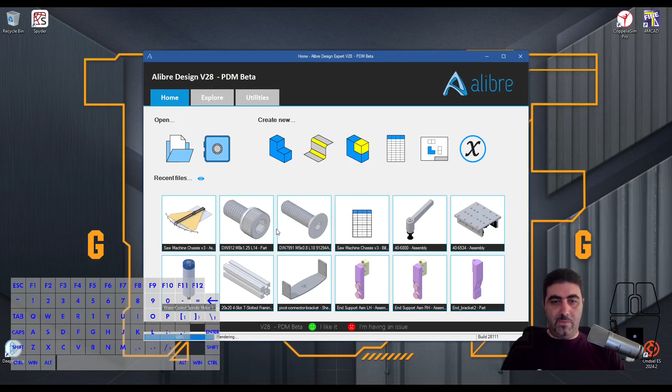So we will be starting a new assembly, and the first part that we will be adding is the carrier, not the I-Beam. We will make a subassembly of each of the two carriers, and then we'll bring it together in the main assembly with the spacer shaft, nuts, and spacers.

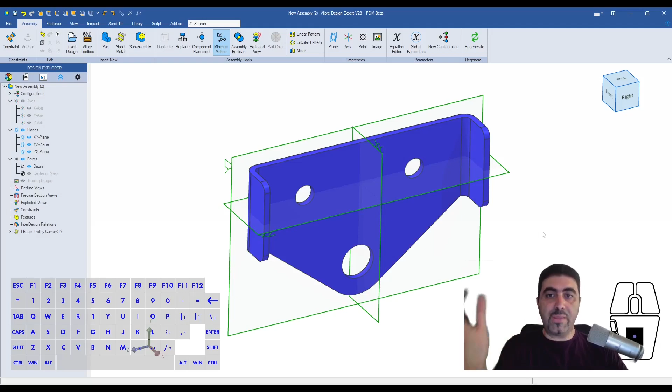Starting tip right off the bat: when we're putting a new part in, we don't just click randomly. If it's the very first part, it's a good idea to click on the origin. You see that I'm getting that little icon next to my pointer, that means I'm clicking on the origin. What happens if you do that is we have aligned the coordinate system of the carrier part with that of the assembly. Then the next thing you do is you anchor the part.

Then we insert the I-Beam roller shaft, 1, 2, we need 2 of them. Now, we said that we'd be putting these in these holes and then welding them. So I will select that outer circular edge, select this one. I didn't anchor it. And then hit Control Q.

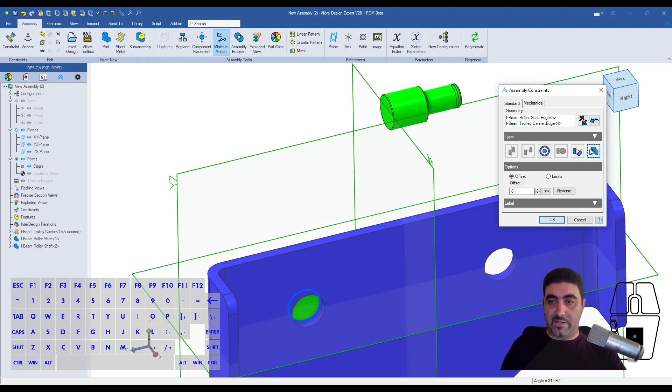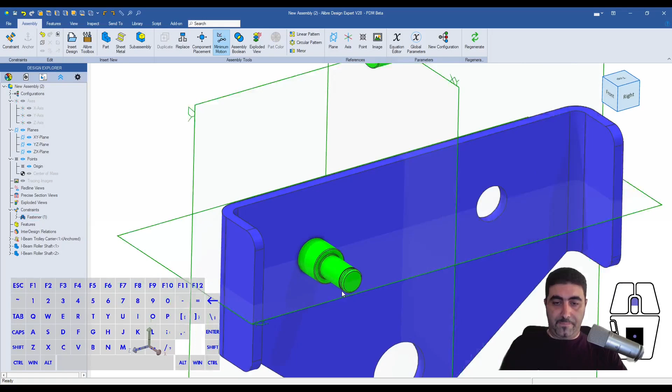Now what happens here? We get the assembly constraints menu, and it's pre-filled. It knows I want the fastener constraint, which is a constraint that is like a coaxial and a coincident constraint at the same time. Of course now it's the other way around, so I will click the flip button, and now it's the way I want it. So this part now can rotate, but it cannot go in and out.

Sure enough, if I open its reference planes, you can see that it can rotate, but it cannot go in and out. Now, if I want to fully constrain it, I will just create an angle constraint between these two planes. Again, I selected the planes first and then opened the assembly constraints. Hit 0, now they're parallel, and hit OK. Let me hide the reference geometry.

Now you saw that as soon as I hit OK, the assembly constraints dialog box went away, right? And that is because I had selected geometry before I opened it.

Now if I hit Control Q and I open it and it's empty, look what happens. I click here, I go to select my geometry, I select this edge and this edge. No, I don't want the angle constraint, which was the last one I used. I want the fastener constraint, and I want to flip it. Okay, look, now it didn't go away, right?

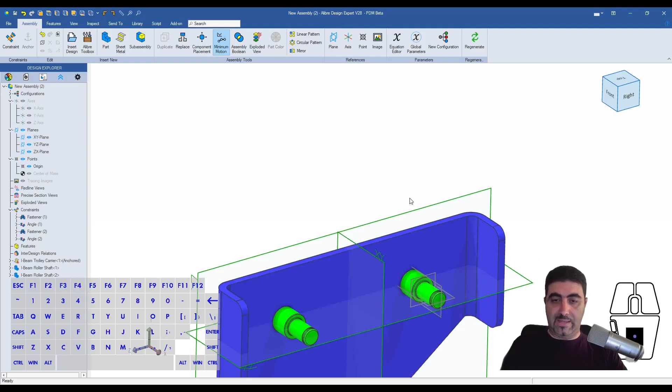So I'll just show the reference geometry. Go back here, select this and this angle. Control A is 0 degrees of angle. And OK. Now you saw that I had to close that assembly menu, and the only difference is that I opened it without having geometry pre-selected.

That's a little detail there that can help you, depending on what you do, it can help you save a bit of time. Okay, so I've put these shafts in. Of course, these will be welded, right? So what do I do now?

Now, it's a good idea to put the roller bearings in. Basically, we kind of assemble it as we would in real life. That's the way I like to do it. It makes more sense to me, and it's easier to keep track of what happens. So the roller bearings we got from SKF.

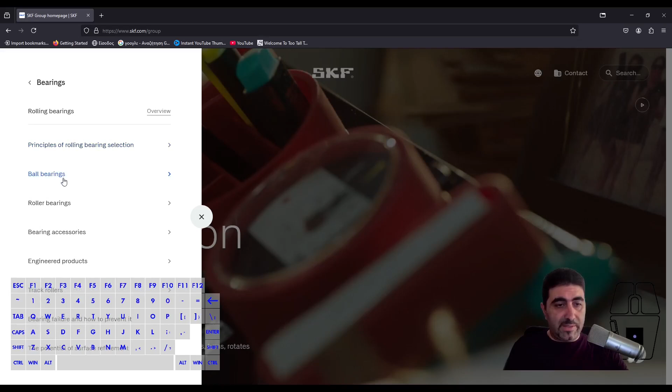It was a 3200, the double angular contact double row ball bearing. So you go to rolling bearings, ball bearings, angular contact ball bearings, double row angular contact ball bearings, and we will find it here. It's the smallest one of the series, so I can just click here. I don't need to search it like I did the other day. Go to the CAD tab.

There you go, we can select it now. It's got a lot of different formats, but it doesn't have an Alibre, so we will go with STEP. Now, a quick tip here: if for whatever reason you download something and it doesn't show up correctly when you download the STEP file, go for the SolidWorks version.

You can go for the Creo version as well, or you can go for the Inventor version as well. Why is that? Because Alibre opens those formats as well, and they're more likely to be correct because they're not an export, right? They're native files.

I will make an example of that. I will show that as an example later on from the McMaster-Carr website, because this is a large part. I don't want to waste time on the conversion.

Our zip file could not be generated, yet I see the zip file and it's got the step file in it. So okay, I will just cut it and paste it in my downloads folder and then close the folder out. Then I go into my assembly.

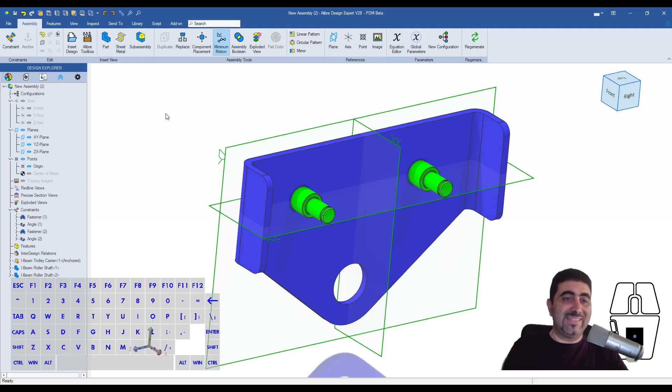because Alibre is going to create an Alibre part for it. And as soon as I create that part and save it to the location I want, I can delete the original step file without any consequences to my assembly.

Okay, so import file options. You see that this is a conversion menu. I hit OK, standard options, and it's telling me that the file was imported without errors.

And in Alibre, you can just click and drag, control click and drag to create a duplicate of an assembly, and it will understand that you're looking for the entire assembly, not just a single part.

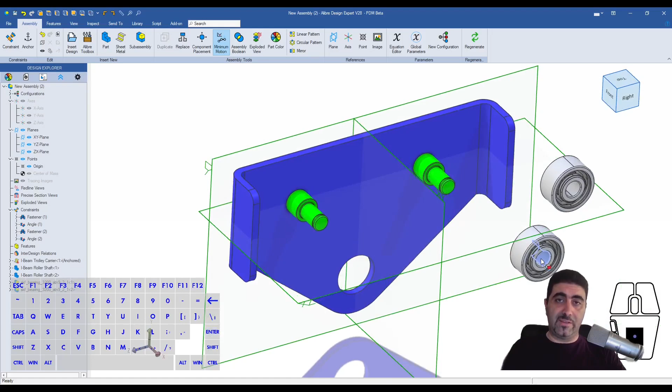So now I will again constrain this with a fastener constraint. Yep, that's where I want it to go. Nope, I want this the other way. There you go, I am done. Okay, now to fully constrain these, to fully have them stay on these shafts, what do I want?

I want the circlips. Okay, let's go to McMaster-Carr for that. And I want the circlips. Well, I want an external.

First of all, I need it to be metric. Then I want external. Then I want the ring OD. Is it ring OD? No, I want the shaft OD. Oh, for OD 10 anyway.

Okay, again, it's showing me the groove dimensions, which were very useful when I was designing the groove. Now look, default download format in McMaster-Carr is 3D step, right? Let's say I want to do 3D SolidWorks, okay?

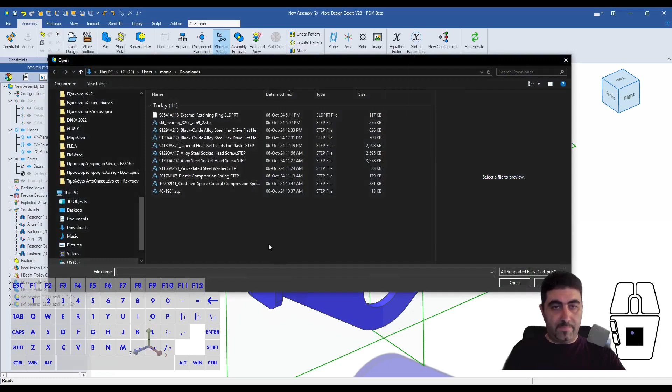So I've downloaded the SolidWorks part, and the way you handle that is you open the folder you downloaded in, and then you close everything off, and then you go to File, Open, right? And you open it from there, you get the same actual menu,

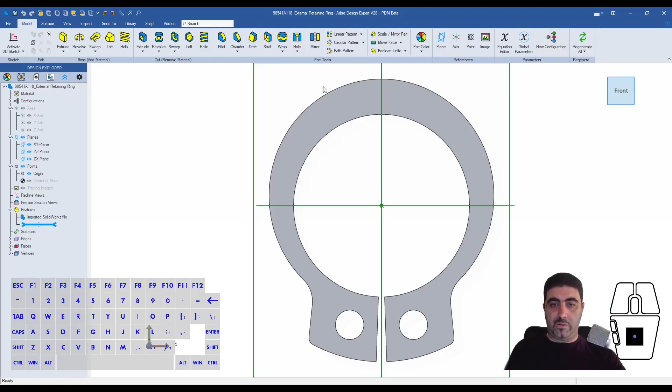and now it's imported. Standard issue with Alibre: you bring in a part, an imported part, and it doesn't show anything, right? But if you regenerate all, you will see the part, and if you change the color, you will also see the part.

That's been an issue since V24, at least that I'm aware of with Alibre. But like Shift F5, it's good to go. I'm not sweating it. And then again, look, this tells me it's an imported SolidWorks file.

Okay, quick tip there. McMaster-Carr parts come with a file name that starts with its product code. Well, and that's not very helpful. So this is a DIN 471 external circlip.

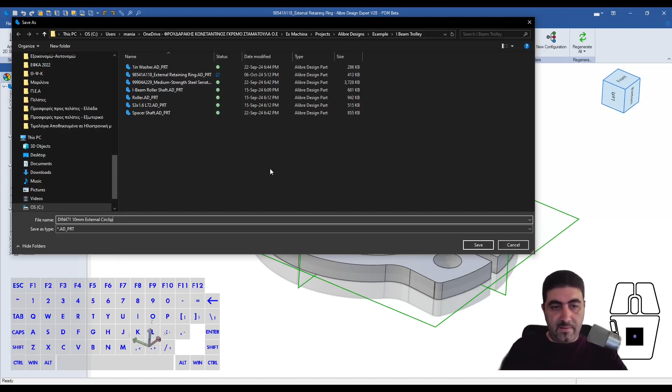So what I like to do, I will do it as a save as now, but ideally you should have done it in the save phase of this whole thing. So you just go DIN 471, right? 10 millimeter external circlip, right? So you save that, but in any case, let's bring it in.

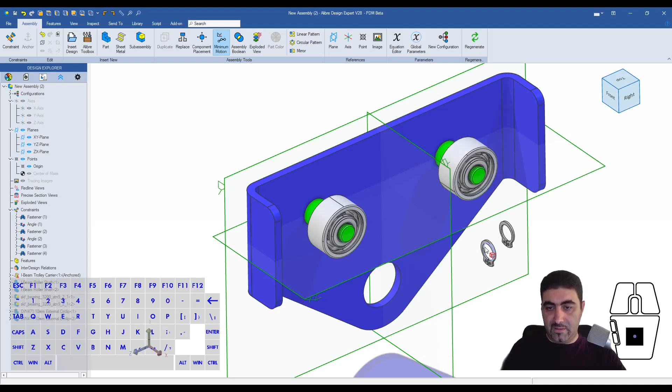So we can delete this and insert this. Again, I want 2 of these. And again, I will do the fastener constraint.

Okay. On. Again, we are away and we're done.

This can still rotate if you really want to pin everything down. You can, but just giving a random parallel constraint, or just even that would work. So let's not overthink stuff.

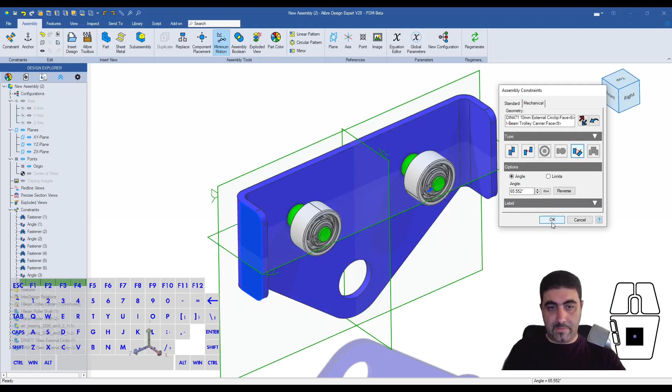Right, if I was assembling this on my bench, what would be the next part? The next part would be the roller. And I didn't assemble it. Look, everybody makes mistakes. If I was assembling this on my bench, I would put the bearing in the roller first.

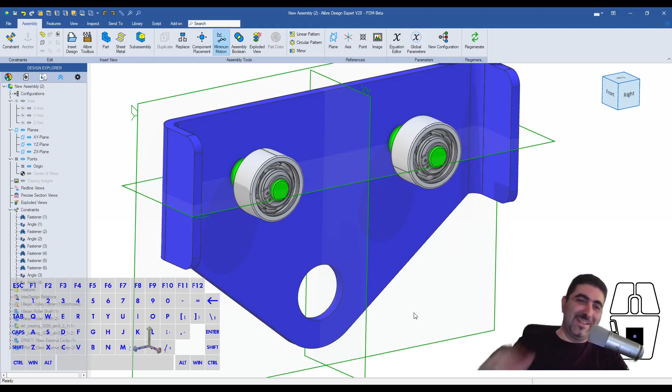But anyway, let's bring the roller in now. The reason I would do it like that is because of the way I designed it, it's a lot harder to get that circlip in now. But okay, we're not worried about that. In real life, I would need to put the bearing in the roller first, put that circlip in first, and then put it on the shaft. But okay, let's do that circlip.

30 millimeters. Let's go back to McMaster Carr. This time we need an internal circlip. So we will go for the internal retaining rings. We want metric, 30 millimeters, DIN 472. So 471 is external, DIN 472 is the internal one.

Let me just do the step file now. Again, I can just minimize, come in here, downloads, that. I'm okay now. File import without errors. Let's put it in there. Let's get a duplicate and let's do the same thing we did before. Is that the way I wanted it? That works. That works for me.

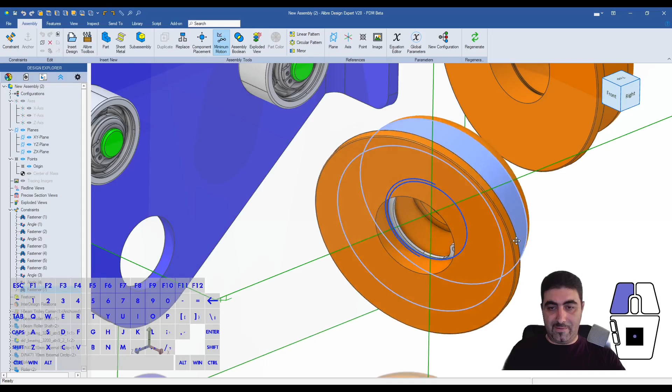Okay, same thing here. And again, I need this split.

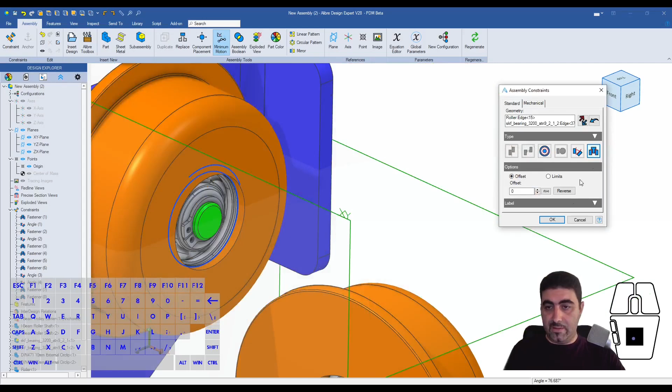Okay, now I need to assemble these rollers. So again, fastener constraint. You see it basically says fastener constraint, but it has so many different uses. Just remember that it does two things at once: it does coaxial and coincident, but it doesn't constrain the revolution. Let's see here. There you go, there's our gap, that we accounted for when we were making our shaft.

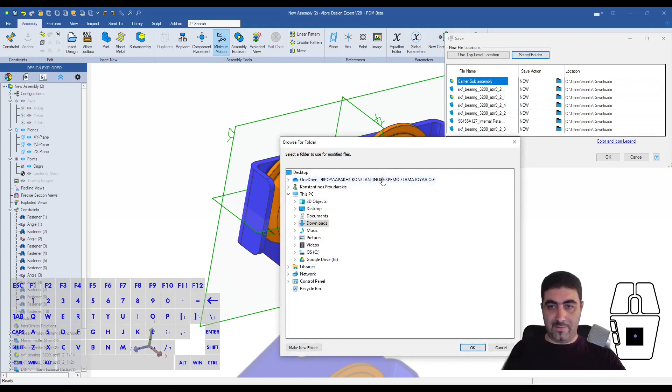Everything is done. So this is a complete carrier assembly right now. I'm going to save this, and I'm going to call it the carrier subassembly. Oh well, it's trying to save it in the downloads folder. I'm going to change that.

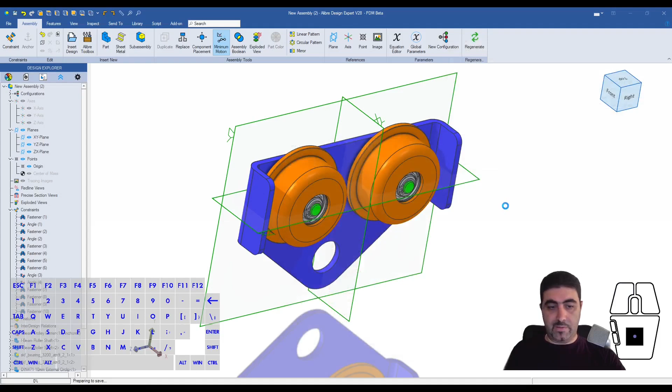But before I change that, again, McMaster Carr part. This is a DIN 472 13 millimeter internal circlip. Now I'm going to select my folder. Hit OK, and everything is saved. Now every step file is converted. Everything is working perfectly.

Okay, so now I can start the main assembly. The way we do that is we start another assembly. The first part we bring in is the actual I-beam. We click on the origin, finish, then right click on the part and anchor it. You see here it says anchored.

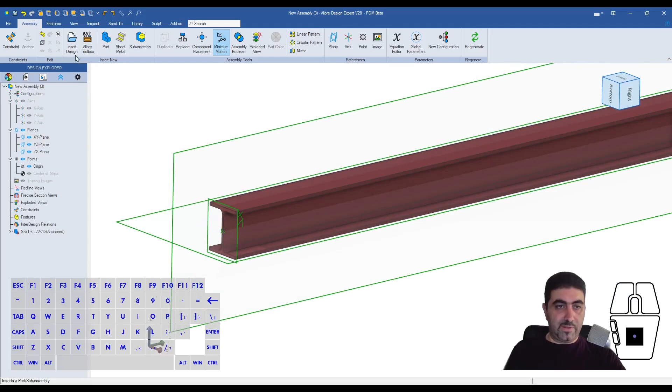Okay, now we're going to bring in our subassembly, the carrier subassembly. We have a complete carrier here. And how are we going to assemble this? Now, you will see that there is going to be some fine tuning in the assembly later on to get everything to line up correctly and whatnot.

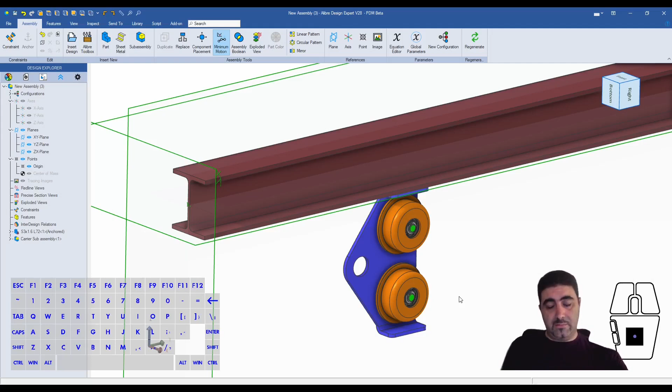And that has to do with the number of spacers, right? The number of spacers I went with in the shaft was a guess. So the way we would assemble this is this: first of all, I'm going to bring up this triad and bring it into the orientation that I want it to have. Then I'll also bring it near the position I want it to have. I mean, that's just avoiding some extra unnecessary work down the line.

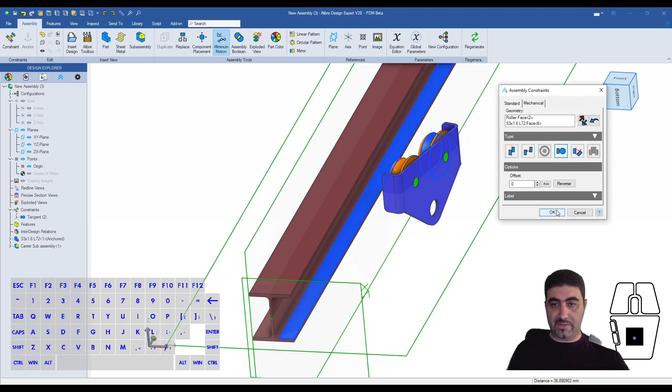So I selected these two surfaces and I want them tangent. And then I want this and this surface, and I also want it tangent. Then I want this flange here of the roller and this edge of the I-beam, I want them at a distance of 1/16 of an inch.

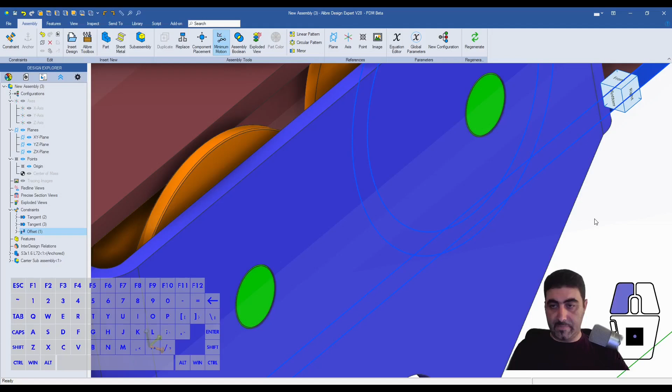See what I did? That works, man. That definitely works. I could have made the roller a bit larger actually, but I gave it a large fillet, so I could have made it a bit longer, but it should be fine. So I am fully assembled here.

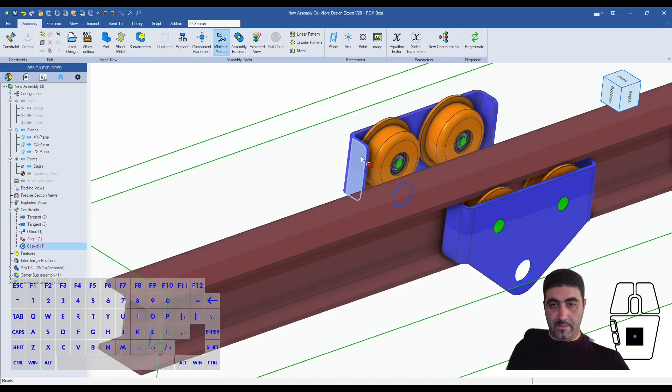I'll create a duplicate. What I'll do is I will assemble the duplicate based on the other carrier because I want them to move together. What else? This, coaxial as well, that should be fine. Okay, and now the distance.

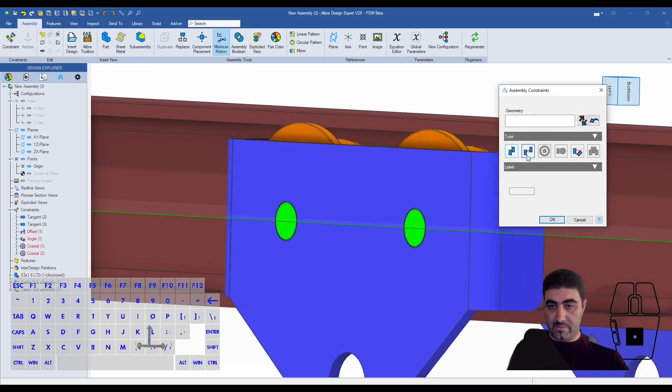There you go. So this is starting to look like an I-Beam trolley already, right? And some exciting stuff. Okay, now I'll bring in the spacer shaft.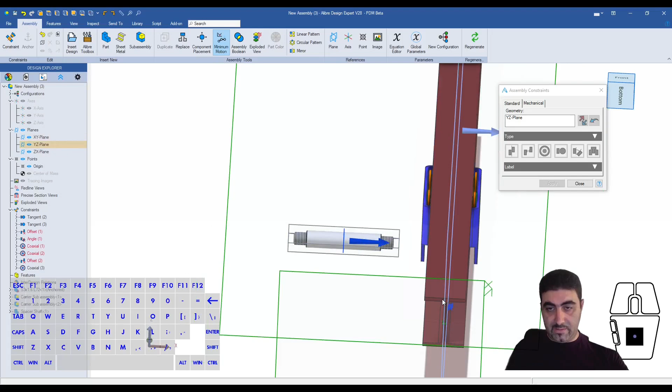Where is my spacer shaft? There's my spacer shaft, and I want that to be coaxial to this hole, smack in the middle. So I will show its reference planes, and then just say that this plane and this plane. I'm looking at the arrows to make sure I am selecting the correct plane, right? So these two planes are coincident, and yep, I should be good to go.

Now I want to fill this space in with spacers inside and outside, and then I'm going to put the two nuts in, and that's going to hold everything together. But we also need another part. That other part is the hook.

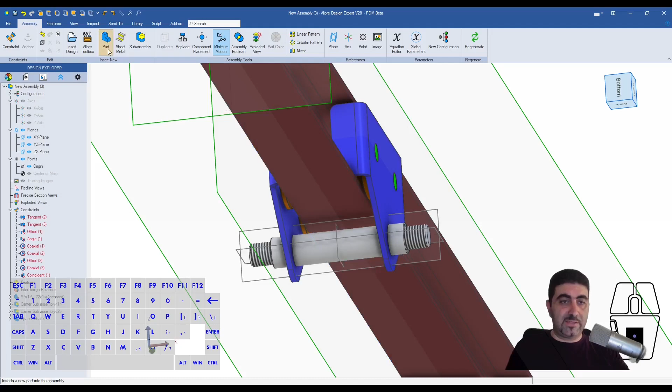Okay, so let's design a part inside the assembly. We will create this part inside the assembly. So I will go up here and just click part, and this will be the hook, right? You know what, I'll design it in here.

Make sure that when you're inside the assembly and you're making parts, make sure that when you are sketching on a plane, you select it from here, right? This is a top tip, not just for Alibre, but for most other CAD systems. You'll see that Alibre already only shows the part's planes, but there are other software where you only see the assembly's planes. In any case, all parametric software, when you're designing new parts inside the assembly, make sure that when you sketch, you're sketching on the part's planes, not the assembly's planes.

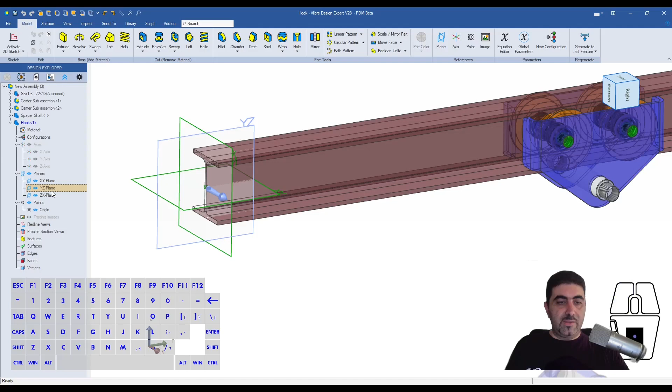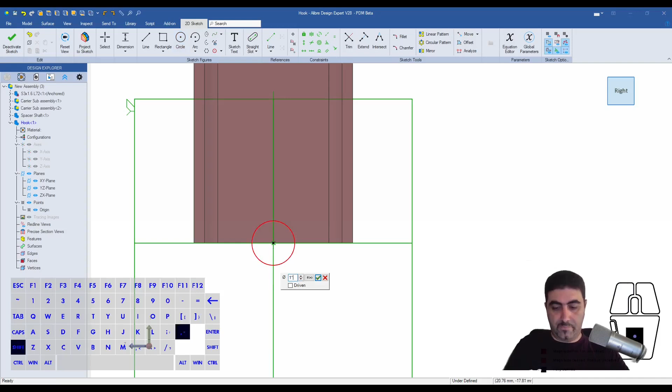So having said that, I'll sketch on the YZ plane of my part. The hook is just a sheet, a laser or plasma cut sheet metal piece. I want this to be 1 inch, and I want this to have a thickness. I don't know.

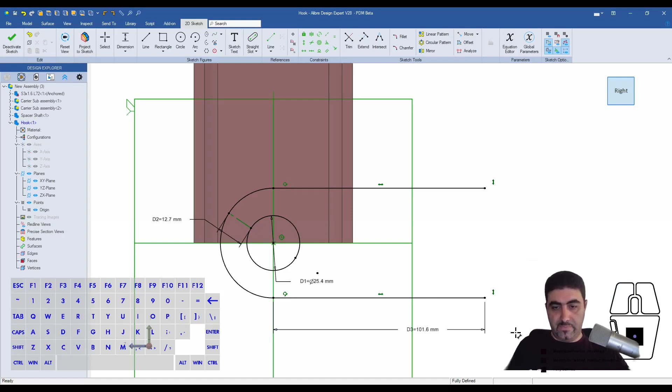Lines here. Okay, vertical constraint there, we already have that. Cool, now let's trim this little piece off. And let's say that this hangs like, I don't know, 6 inches... 4 inches. And then I'll start a tangent arc. Come on, there you go. Again, a vertical constraint, and let's give that 1.25 inches.

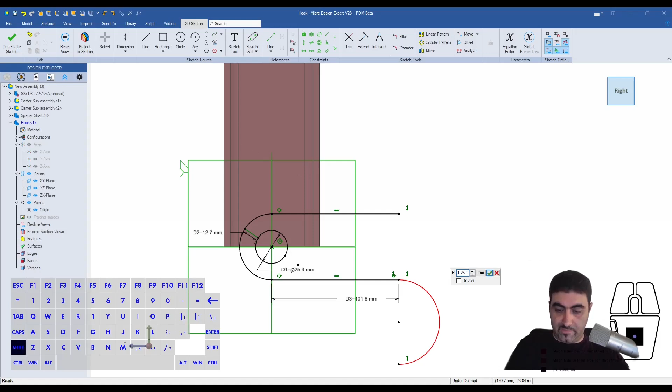Okay, that didn't work. So in vertical. I'll leave it here and give it a coincident, and then give it a tangent. Oh, doesn't need the tangent. Okay, so that's my hook.

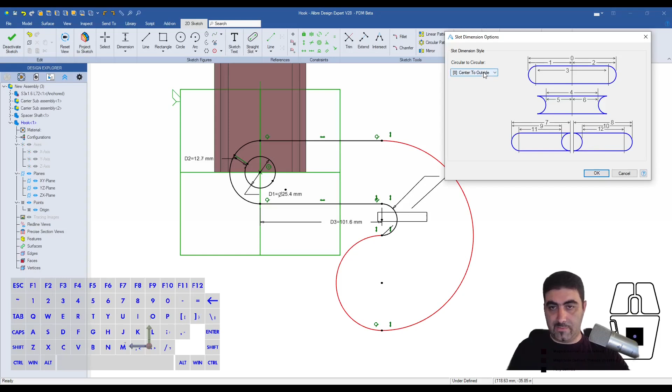Let's do that 1 inch. Let's make this distance. Okay, which one do I want now? Oh, man. Okay, I just want these to be... I don't want these to be locked. So I want this to be 1 inch.

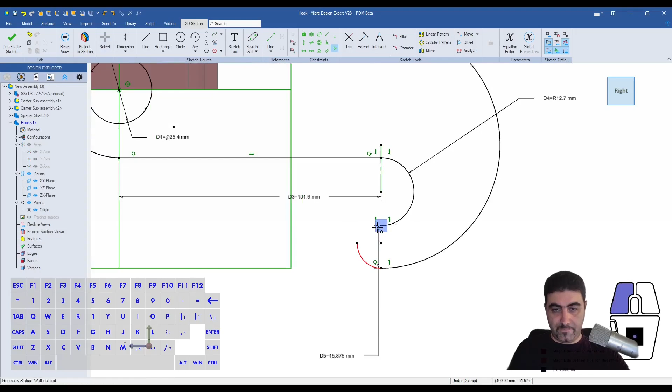There you go, that was the mistake before. Yes, this makes more sense. In any case, let's suppose this is a hook. So I'm going to do the extrude move and say that this is a 5 mil hook.

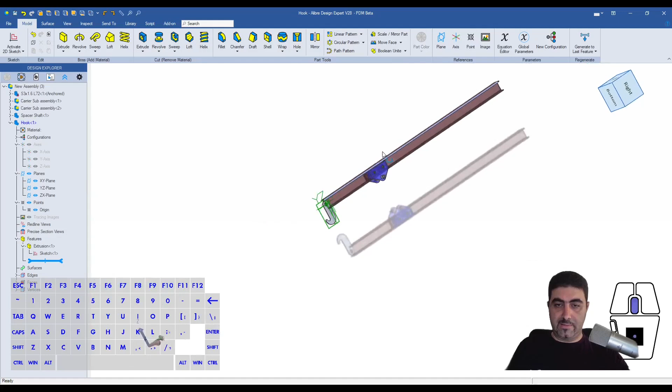And now that we're done with the design, I will right click here and check edit part, and look what happens, I can move it freely. That's why I stressed that we need to design it on its own plane, right? Because if I was designing it in the assembly's plane and using the assembly's origin, then I wouldn't be able to move this. I would move it and it would regenerate back into its original location, which is annoying.

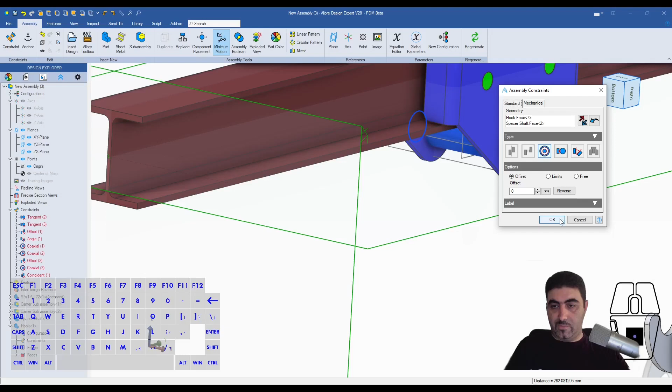So again, I'll make this coaxial. I'll also show its reference planes, and because I did the mid plane with the... not the face, man.

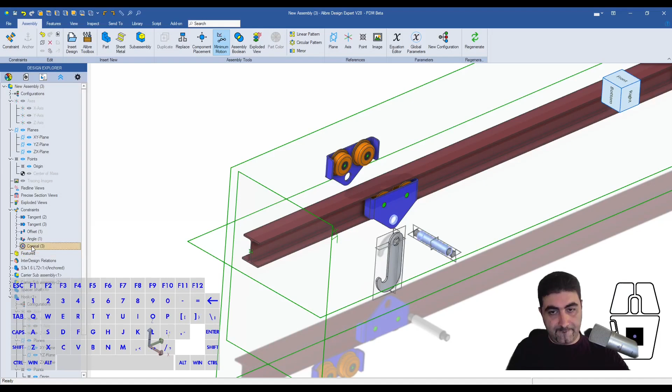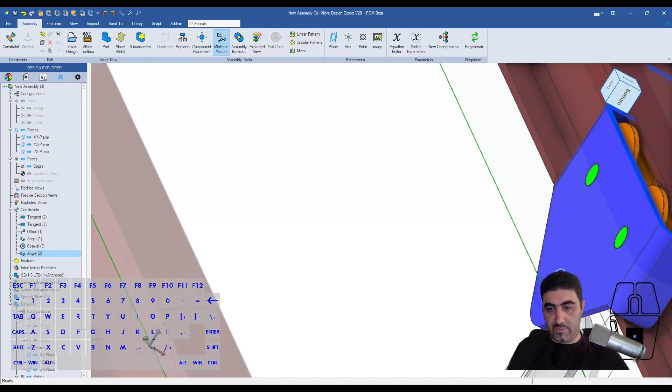Okay, so I realized that I had quite a few constraints that were unhappy, so let me try and do that again. Okay, I've got the angle going there. Here, let me give this angle as well. And then I suppose that now the simple coaxial should be fully there.

Okay, so the reason I'm getting this X here, right, Alibre is not like SolidWorks. You don't get yellow marks and red marks and all that, it's just telling you that there's an issue there. If I go check the status, it's telling me that this is an overdefined constraint, right? So yes, it can solve that, but for some reason it thinks that doesn't need to be there.

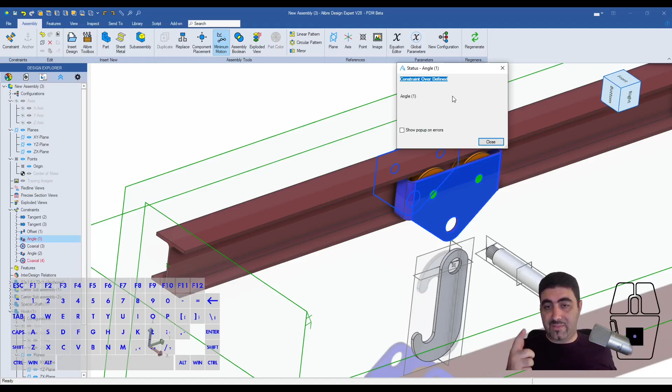And I'm going to do a video about that. So when you're selecting two faces in Alibre, it's not like SolidWorks or Fusion or whatever, where the software automatically thinks that you selected the plane that face defines. So here, by selecting these two planes, these two faces, I just selected these two faces.

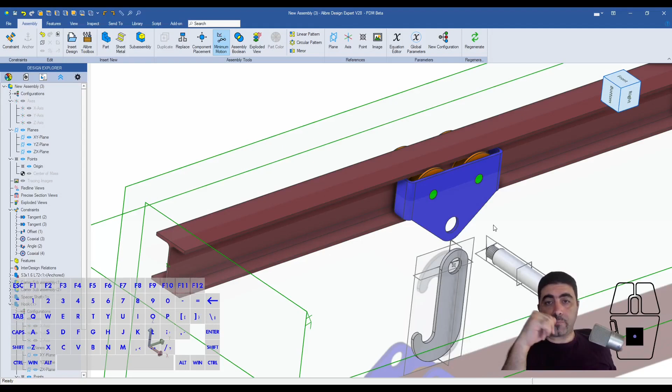So when I gave it an angle of 0, that means that this edge with the other edge should be at an angle of 0, and also this edge with this edge should be at an angle of 0, which basically defines the stance of this thing in space completely, as well as the faces themselves. So that's what I think happened, and that's why it doesn't need the second angle.

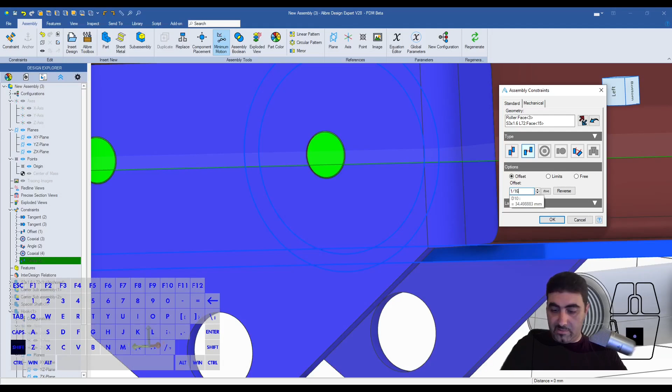In any case, let's just give that the offset of the roller flange again. And it's happy now. Okay, cool.

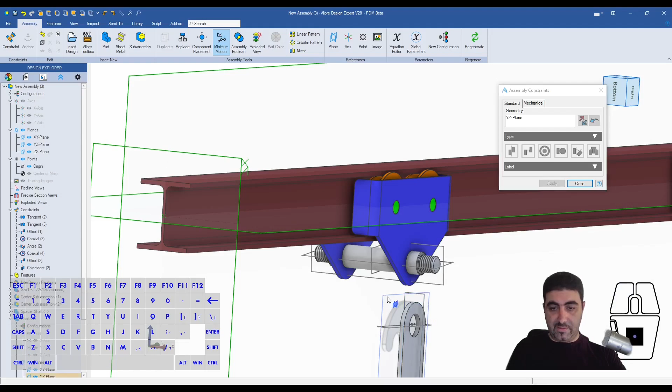We've still retained this coaxial, so I'll just do this and this. Okay, and then this and this. Okay, and then this and this. Offset of 0. Okay.

It's not clear. It just clears, which is how we like it. Okay, so that hook is terrible. Luckily, we can fix it.

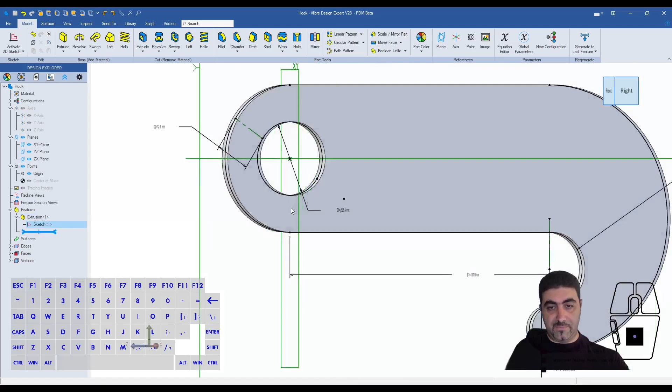I'll edit it in a separate window now. Again, Shift F5, I'll edit my sketch here. I think that if I take this at an angle, it'll make more sense. Like 12 degrees. Yeah, that looks more like it. That's almost acceptable. Okay.

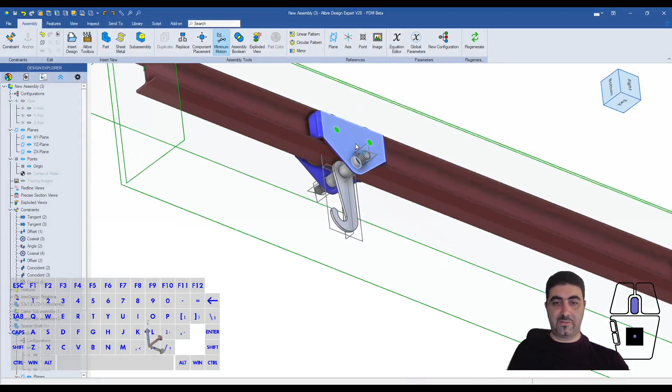Now, and we also need to edit here. We need to give the hook a color. Okay, let's make it bright red. Bright red, easy to spot from far away. I could have made it bright yellow actually. Anyway,

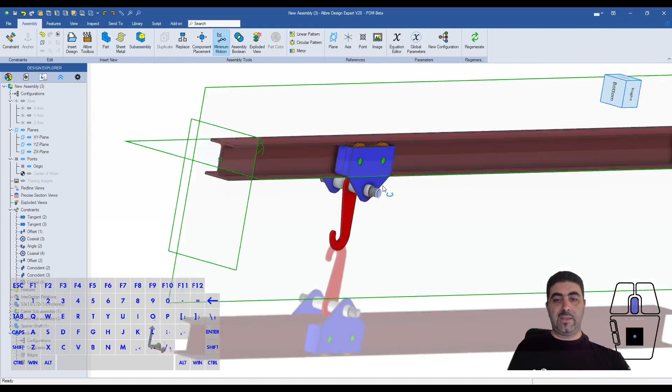Let me turn off the planes of the individual parts, also known as reference geometry. And this is our I-Beam trolley. All it's missing is the flange nuts and the spacers. So this looks like an I-Beam trolley. All it's missing are the spacers.

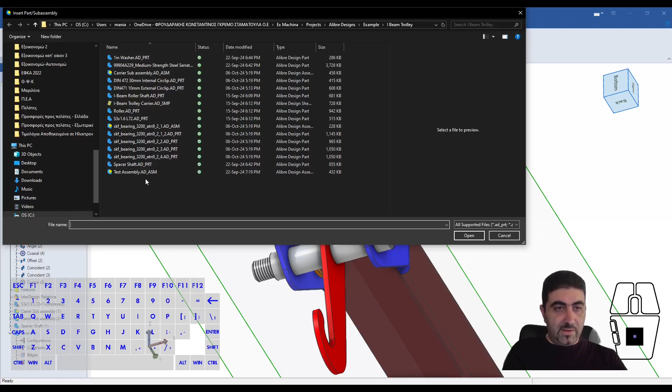Okay, now the spacers, I find that it's more trouble downloading than designing. I did design one in the video that I made the spacer, and I should have it already. So if I go in here, I should have a piece called a 1-inch washer.

Now put it in here. Now I want 4 of these. Why 4? You'll see why, because I'll be assembling them and then patterning them.

We need a fastener constraint there. We need a fastener constraint there. Don't want that going away now, so we need a fastener constraint there. Where are you? Fourth one? There you go. And we need another fastener constraint there, and like so.

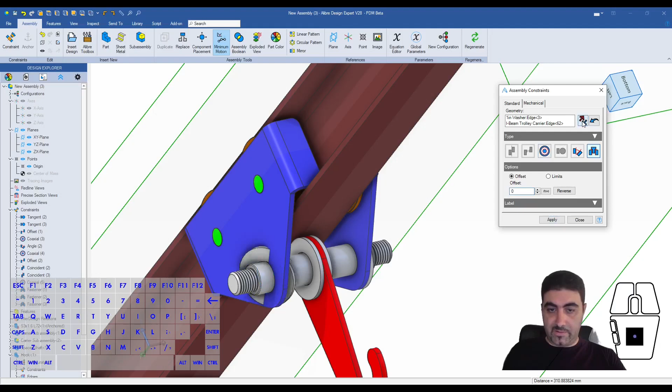Let me just save that. Yes, I want to save the hook. Yes, I want to save it in the same folder. Quick tip here, I don't think Alibre does internal parts like SolidWorks. And thank God for that. I kind of hate that in SolidWorks.

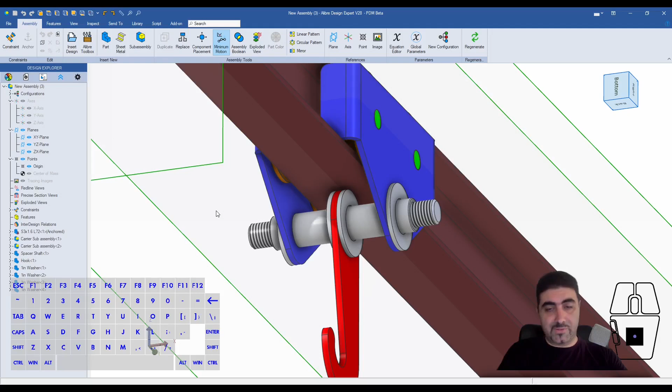In any case, so let's say I'm the designer, right? I'm the chief engineer of this project. Me and my team will design all of that, and I want to give it down to the guys on the production floor to start making this, or to the production engineer so that he can design his production. It's pretty important that I tell them how many washers they should put in the plastic bag, right? So how do we do that?

Well, this is how thick was that? Okay, that's a different number in inches, but we can go with that. So that is 3.3528 millimeters. And the space from here to here that it needs to fill is 36. Let me write these down.

So I'll just open it. This is 36.235003. That one was 3.3528. Okay, so if I divide these two, right, I get 36.235003. Well, divided by this point, this.

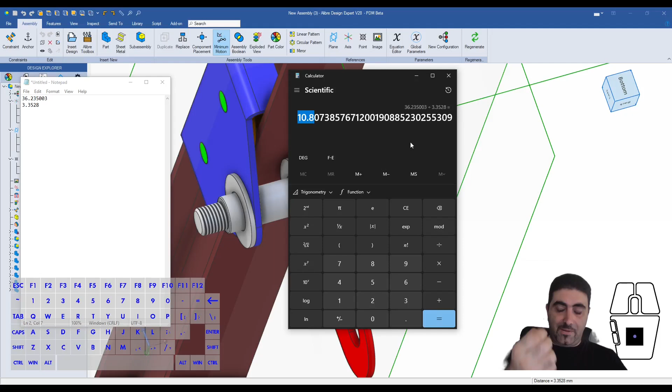The problem, I need 10 washers, and then I need 0.8 of a washer, right? And that doesn't work. That doesn't work because I can't put 0.8 of a washer there. I need to have an integer there.

So why do I do that? Well, again, let me show this. So I'll work with the calculator for a bit. So I have a 0.8, right? So 0.8 of this thickness is 2.6 millimeters, okay? 2.7, let's say now, a 1/16 of an inch is 1.5.

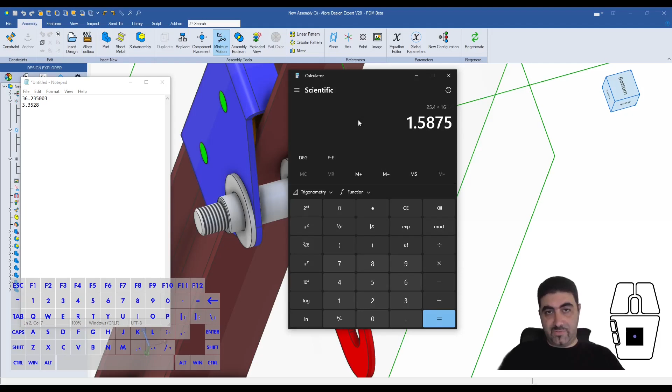So my gap here is roughly 1.5, and I need to find 2.6. I can't move these things inward to get the number to become an integer—of course, if I could, I would prefer it because I'd be using fewer spacers. So I need to move it outward, 0.2 times.

3.3528, which is this number. Just copy this directly. I'll go into my equation editor, and look, these are the two offsets, these are the two 1/16 of an inch. I will just say plus Control V mm, plus Control V mm. Hit OK.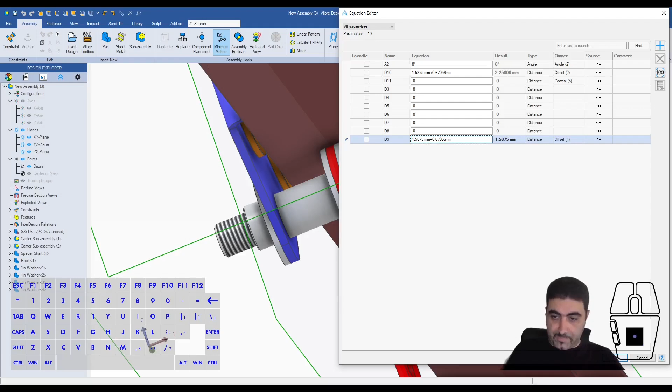Generate. These moved. Now let's do that again. Let's check this space. Okay, now the number just changed to 36.905563, and if I divide that

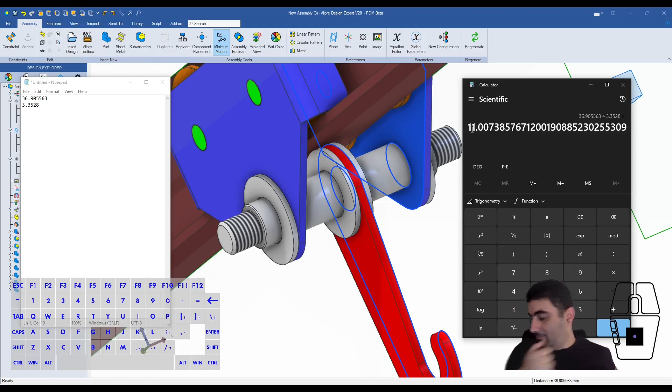by 3.3528, I get 11 and a bit. It's close enough, right? This is close enough. You can just say that this is tolerance. I'm completely happy with this.

So now what I'm going to do is take this and linear pattern it along this direction. I want 11 of these, and my spacing is 3.3528. Okay, and would you look at that?

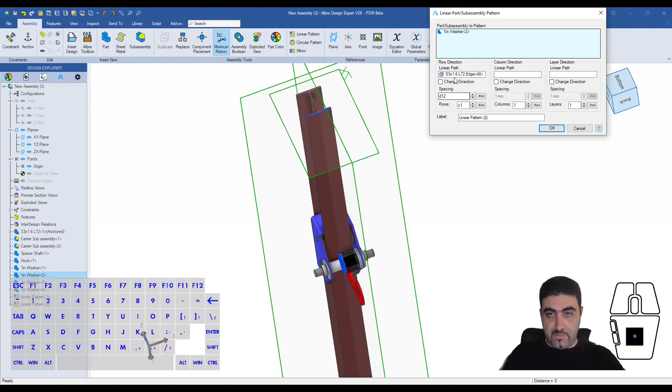And of course, we can do the same thing here. Well, actually, I can just say that this is C1, and then I can just say that this is D12, and change direction. Now when I tweak this pattern, this will correspond.

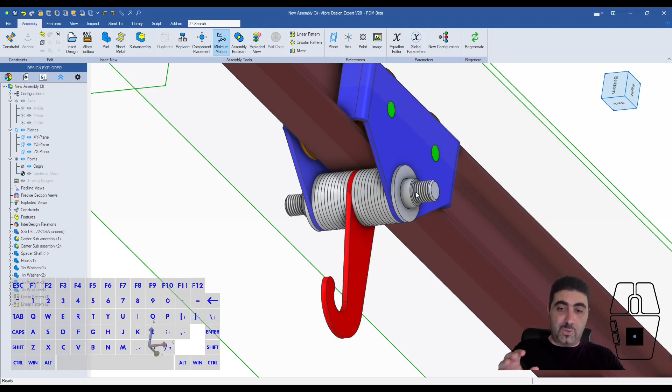I'll speed through the same deal on the left and right spacers. Just bear in mind that in this case, what we'll be playing with in order to make it larger or smaller is the actual width of the spacer shaft. This is not an assembly issue—this is assembled to be dead center, so we will be changing its width.

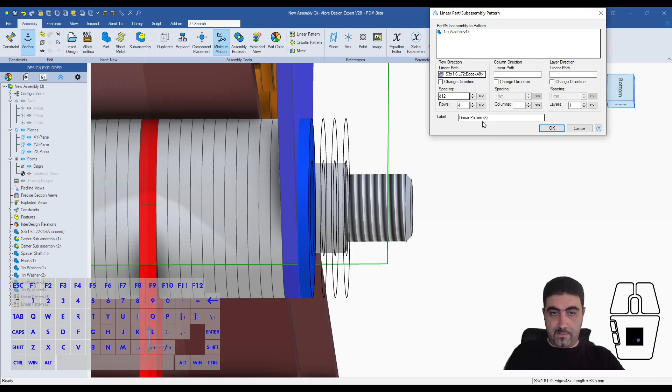Okay guys, so it seems the difference here is about 1/10 of a millimeter. I'm happy with that, I'm not changing the spacer shaft. So I will just make this 4. This was D12. Yeah, wait. Go.

Same here, let's linear pattern this. I want this to be C7, like the Corvette.

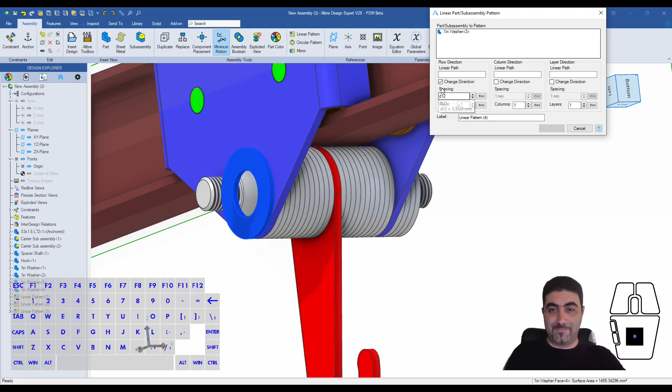Was that the last actual Corvette? Yeah, C7 was the last front-engine Corvette—the last real Corvette. Sorry for that, guys, sorry for that C8 Corvette, guys. If it ain't got the engine in the front, it's not a Corvette.

And now I need to add my 2 flange nuts. Okay, I have somewhere here... yep, serrated flange lock nut, so all that goodness. Let's do 2 of them at the same time.

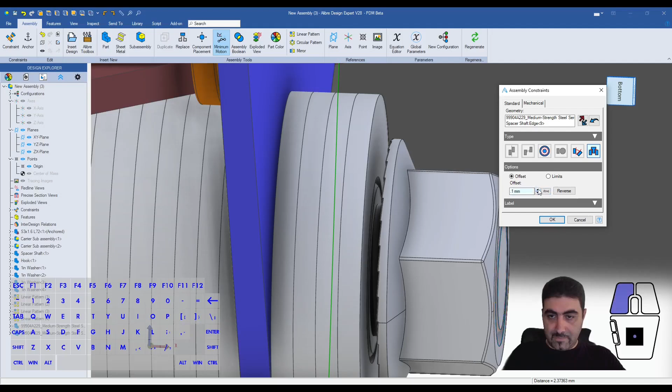This edge and this edge get a fastener constraint. And then I'll play with the offset until the serrations touch. 2.1—say, nice, that's good.

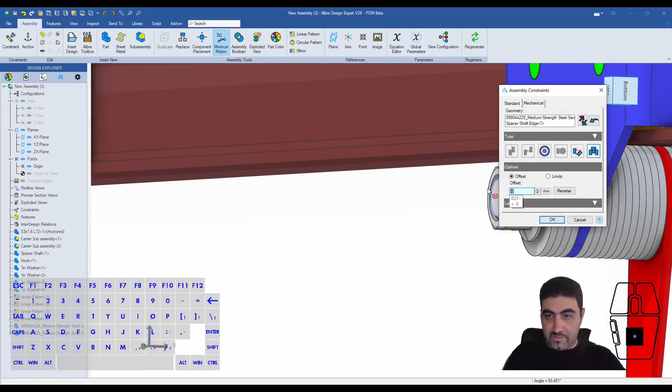Let's go do the same thing here now. Offset 2.1, reverse the offset. And okay, let me do one final little thing—edit it here, change the color, give it a nice, oh I don't know, pink.

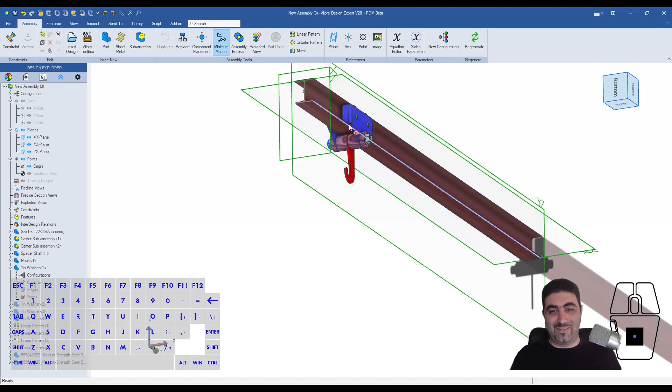And look, guys, what we've got here is an I-Beam Trolley. The things you see left behind that catch up after a while are the patterned instances—you don't regenerate immediately. Hey, I can live with that. Okay, and that, guys, was an I-Beam Trolley, right?

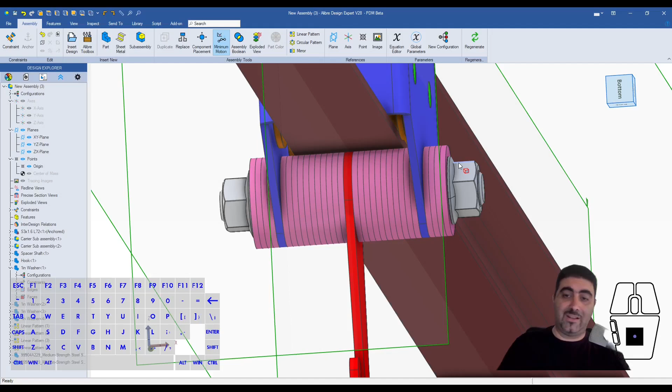So how would you adjust this for a wider I-beam? Well, you take the lock nuts out, you take these 4 washers out, you take the carrier out, you add 2 washers on the inside, add the carriers, lock with the nuts—you're good to go for a wider I-beam. And that's it.

So that was the I-Beam Trolley mini project series. We designed a product that has everything it needs to go into production and go on a shelf. We did that over a few videos with Alibre. This is a complete product—everything you need to manufacture and assemble in order to create that product is there, and that can go like that on a product shelf. That was the purpose of this mini series.

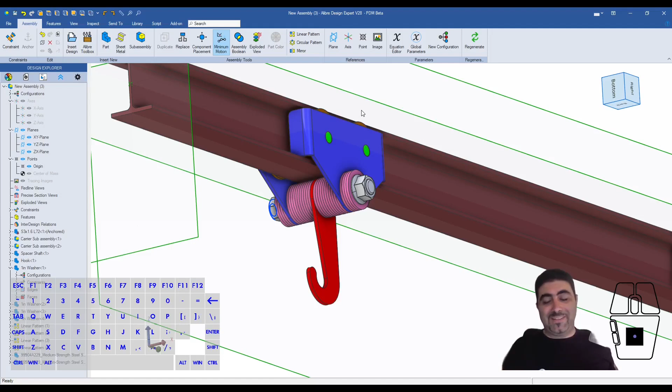I find it amazing that it is so easy to do these days with such powerful CAD systems that we all have available to us. And I hope you liked it, and I hope I see you in the next mini project series.

Spoiler alert, there are going to be gear ratios involved.